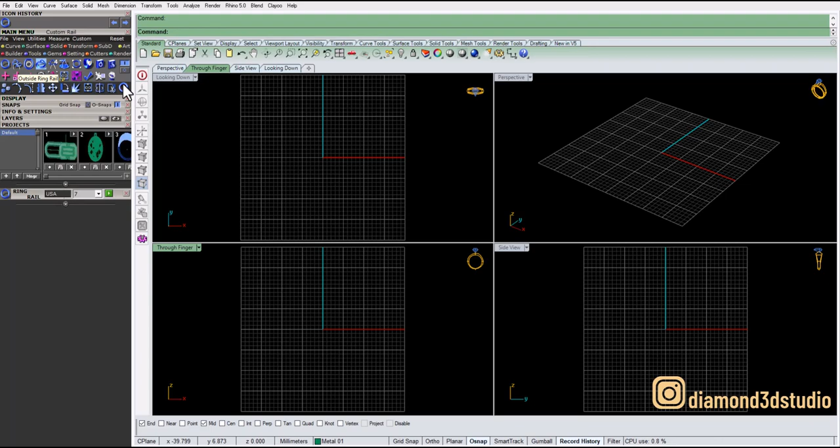Today I'll be explaining a few basic things about the ring rail and the outside ring rail and how you can use it making your own custom ring rails. Alright, so let's imagine this. Okay, I'm not going to use the one which we have over here. Let's do it with the basic curve, basic circle.

So let's take a diameter 17.5 and let's take another circle down here, 2 points. I'm gonna use the quads over here, so this one gonna be 1.5 and the other one on top gonna be, okay, I need the 2 point again, and this should be, let's say, 2.5. Alright, so again using the circle command, I'm using a 2 point and oops, I missed it. 2 points, click here and you click here.

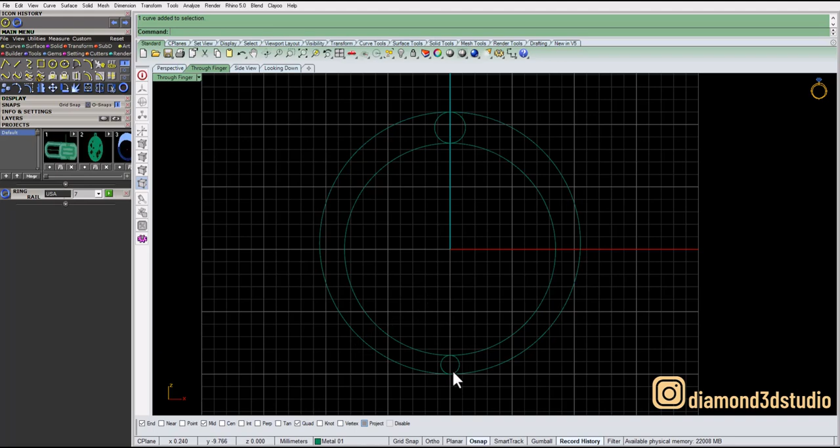Alright, so the idea over here is, if you know the width, if you know the thickness over here, let's say the ring thickness, the bottom thickness is around 1.5. As you can see, this is 1.5 and this is 1.5, and imagine if you need a width which is around 1.7, then you could do the same way. You can just draw a circle here, 1.7, enter, and then

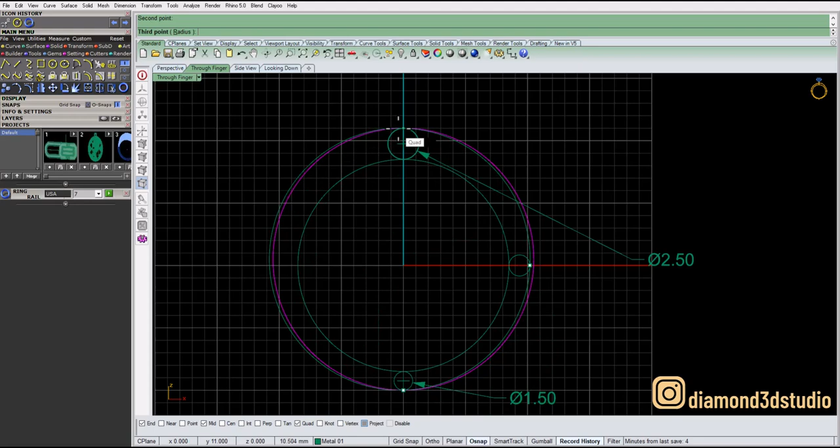using the same circle option, using the 3 point, I'm going to place one at this and one over here at this quad, and the third one at this quad over here. Alright, so as you can see, this was the previous one which we did with 2 points, and this is another one where the thickness is 1.7 at this end. Alright, so this is how I do a manual, let's say, outer ring rail.

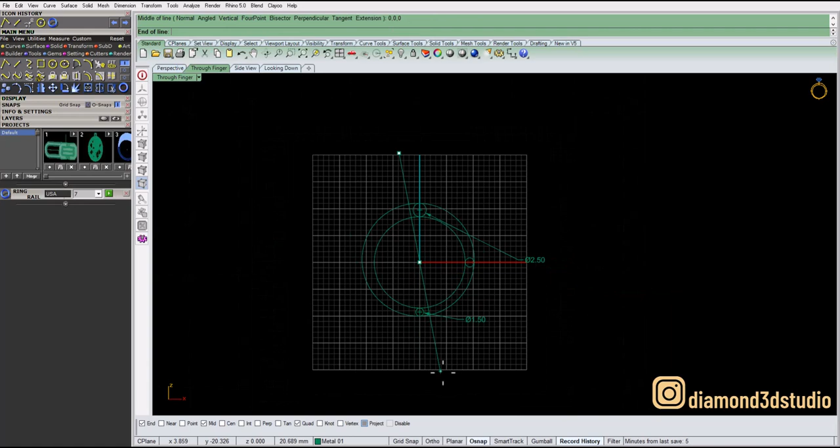Okay, and you can delete this if you want to, and I will just draw a line both sides, enter with the F8 option on, and make a straight line. Select this line over here and trim this out. Alright, or you can just do a mirror. Alright, so the important thing over here is rebuild them. Just join them together and then rebuild them together. This is the one command which I always use more often.

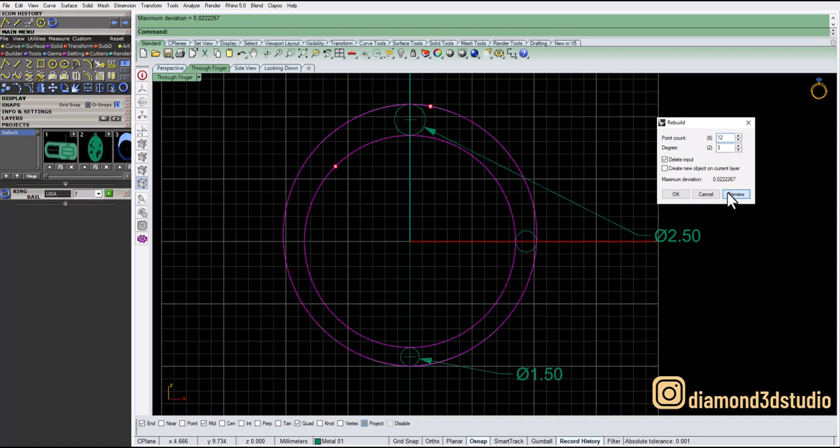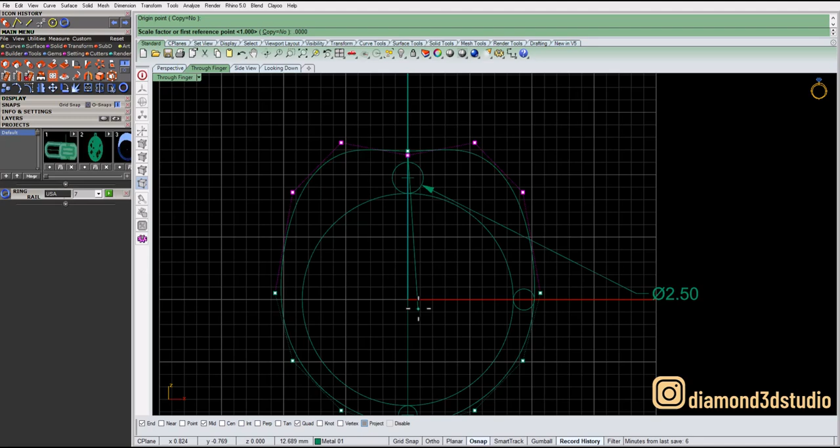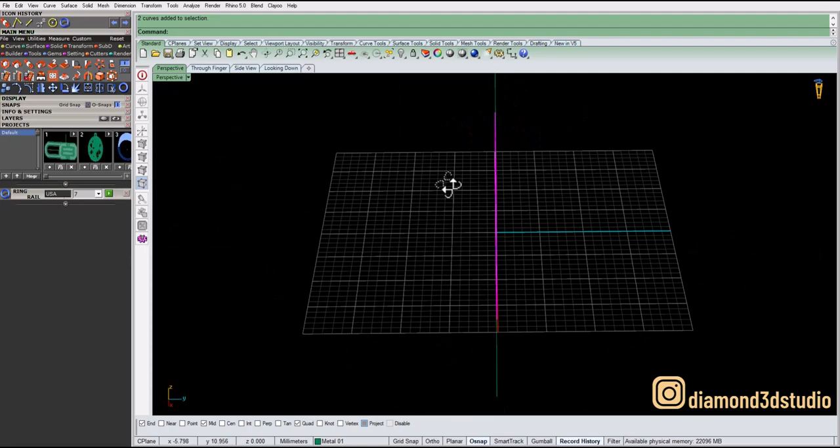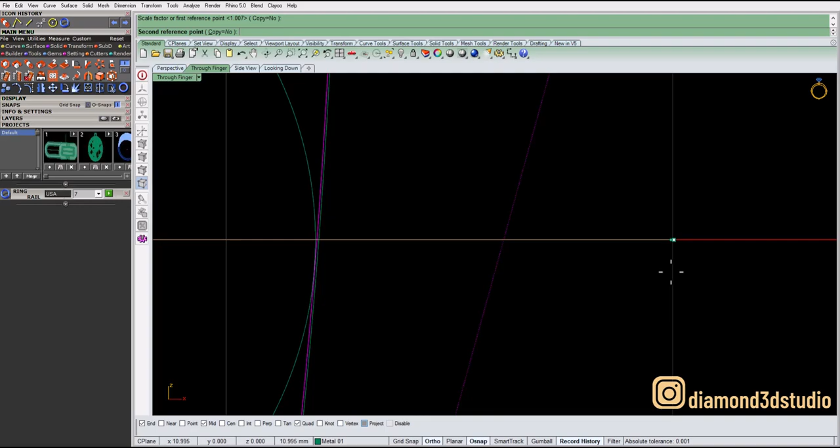Alright, okay, so this is the basic tool, basic way of doing it, once you have your parameters set. Okay, at this point I just lost the 1.7 thickness, so what I can do, again, select these 2 points and just scale 1D them, once they touch. It doesn't have to be that precise because you're zooming it 100 times, so if it's just crossing this circle, it means that we are on a safer side.

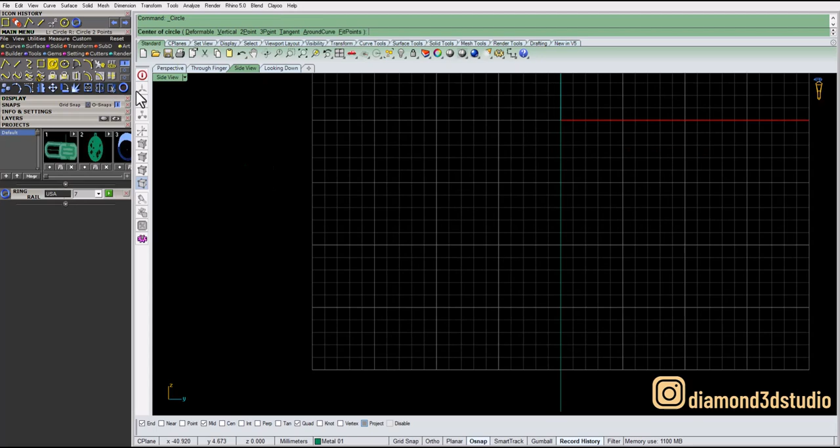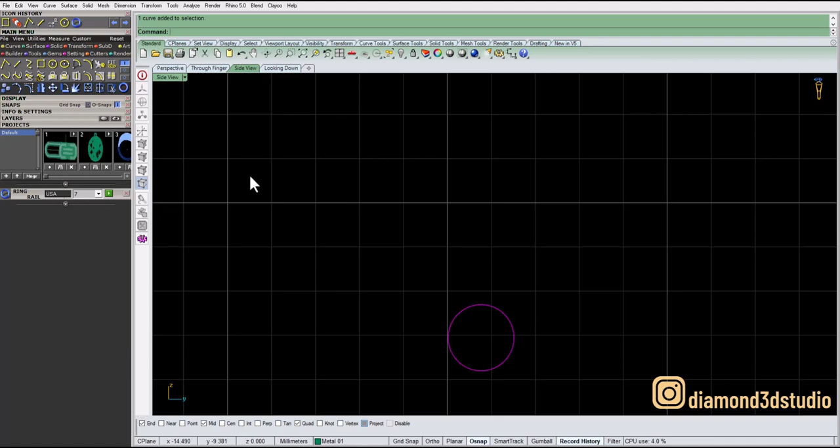Alright, okay. So this was my ID and my outer ring rail, and now I'll be using a section, let's say one which is manually made, 1.5. 1.5 is the circle over here, and then I'm going to rebuild it with 12 points. So what I've done over here, I have made my view profile, which I often use for making an engagement ring or any simple band, and this becomes so handy to use.

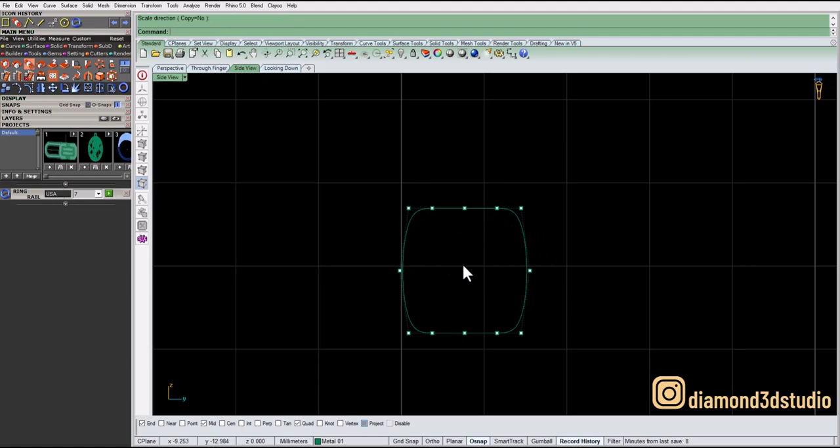So let's take this section over here, let's do a scale. I'm going to do it 0.001 enter, so it's almost like a zero value. And then you do the same over here on the upper side. Okay, if for some reason you need the section to be comfort fit, this is how you can just play with these points.

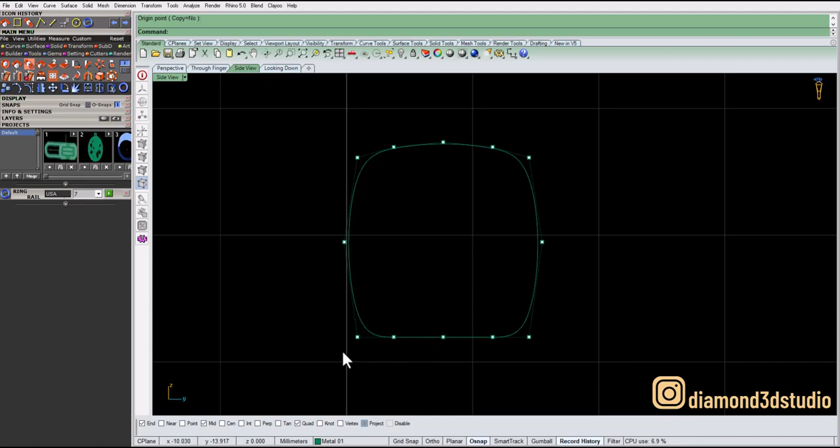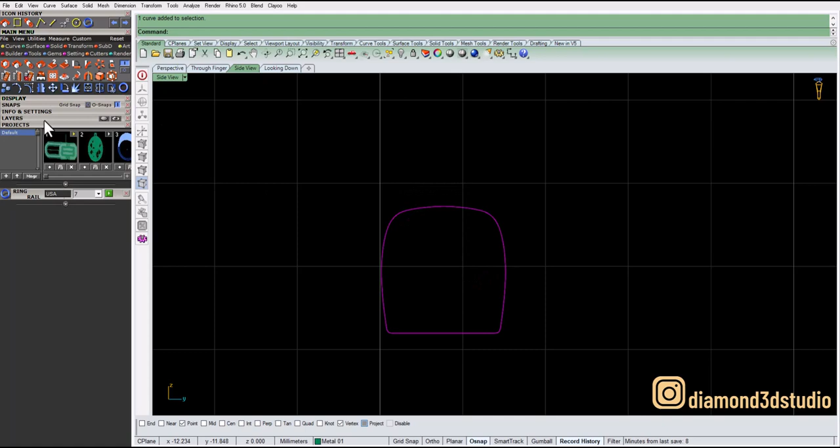And if you need a pointy edge, all you can do is select these 2 points and then do a scale 2D. Okay, so I'm gonna use this vertex and, let's say, points, click here, 0.001, enter. I'll do the same over here, 0.001, enter. Okay, so this profile is pretty much ready to be used. I'm going to use the quad here and place it down over here at this point. Okay, so switch off the Project. Okay, and as you can see, this is placed very well.

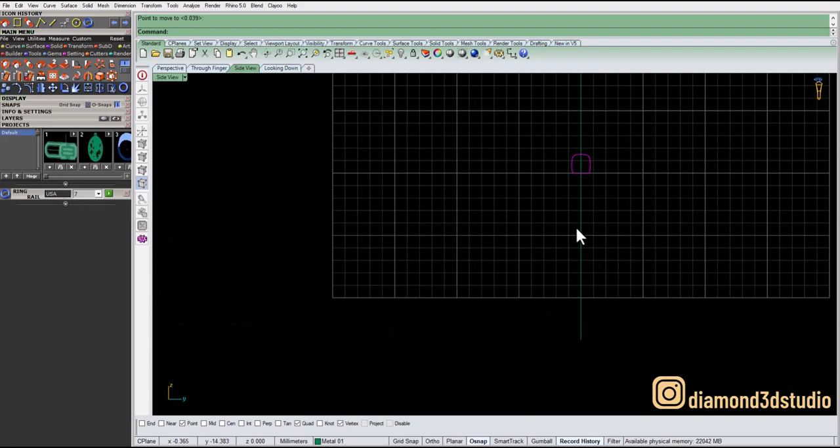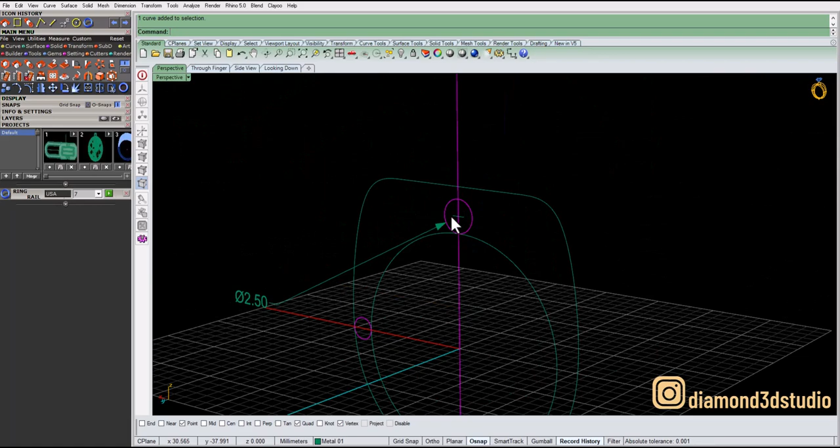And make sure that, okay, let's just get rid of this curve. We don't need them anymore. And these circles are more like to have the proper dimension, so just hide it. Oops, I didn't want this to be hidden. Alright, so select this, and this, and hide it. Or you can just delete these dimensions if you don't need them anymore, and you can scale it to make sure that this profile is touching the outside ring rail over here.

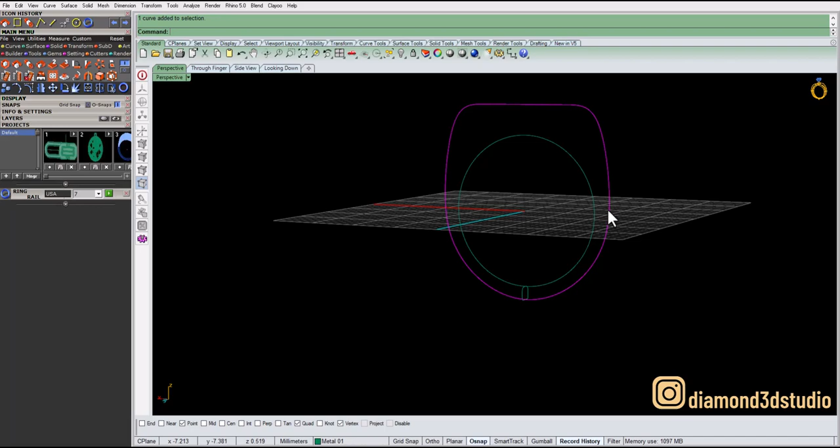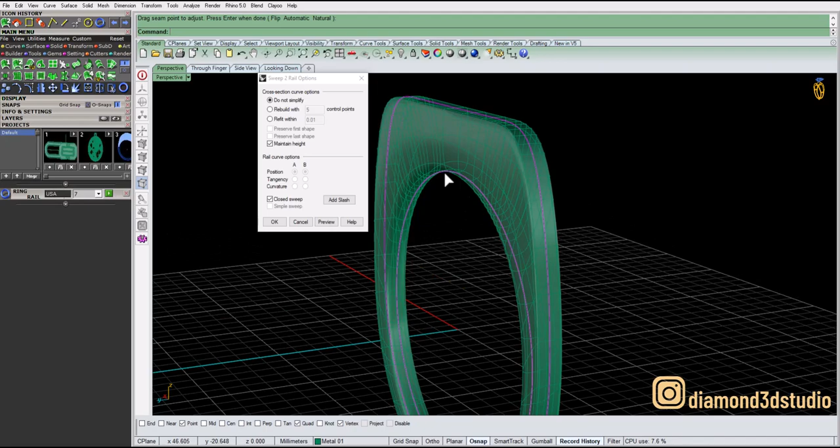Alright, so this is what you see here. Okay, so this is rebuilt, and the section over here is also rebuilt. Okay, so let's just try a sweep 2, enter, move this to quad. This is very basic, and make sure you don't make that mistake. Maintain height, and you can preview, or if you want to have another profile, you can add one here. Okay, and you can just change the weight. So let's just do that as well.

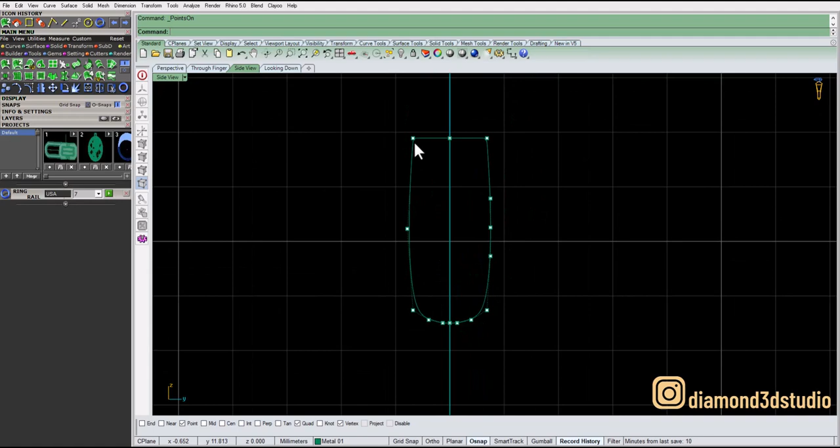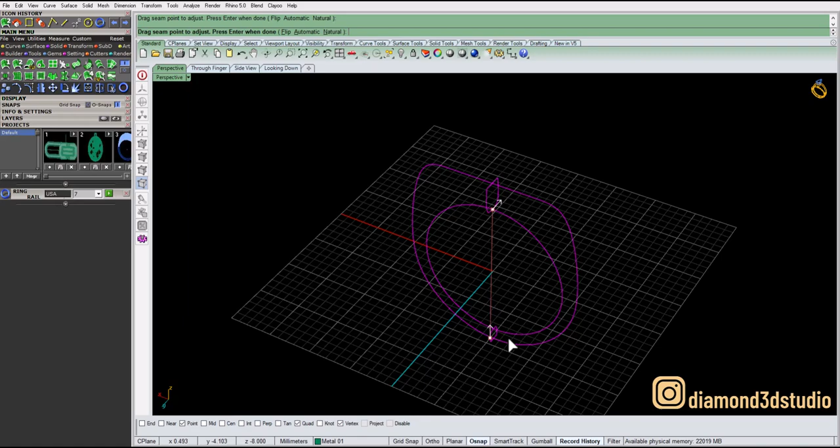I'm gonna draw a section from here. Okay, delete this. Alright, and then we have the same profile which we've been using down, and here I'm gonna just scale it down, scale it up. I don't have a dimension right now, but this is just to give you an idea. And anytime you do sweep 2, just make sure you select the profile which is down and then go up. Don't start from up. Okay, and then closed sweep, preview, press OK, and that's it.

Alright, so using the same technique, I've made a ring which you can see in the next couple of minutes.